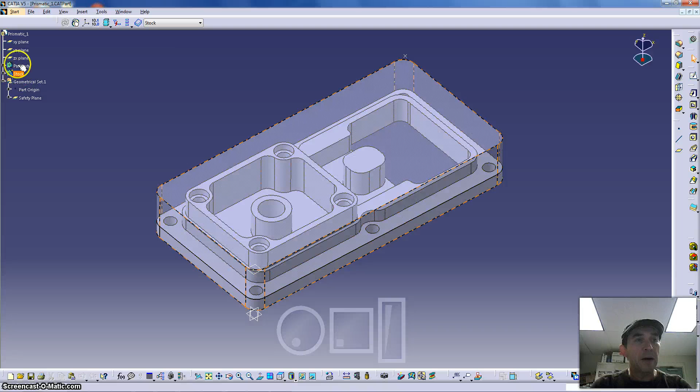If you go over to the part tree, you'll see that there are two bodies in the tree: one is the part body and one is the stock. I'll temporarily hide the stock so you can see the geometry of the part that we'll be machining, and we'll be using this as an example throughout the term to get you familiar with the different machining operations. So this is the part body, and the stock is almost rectangular, with corners that have fillets, which overlaps the final geometry.

This is one way in which you can start off. Obviously, you can also do it using assemblies, where you have one of the bodies in one part and the other body in another part, and we will show you how to do that at some point. But to start off with, both the geometry of your part and the workpiece are in a single part file.

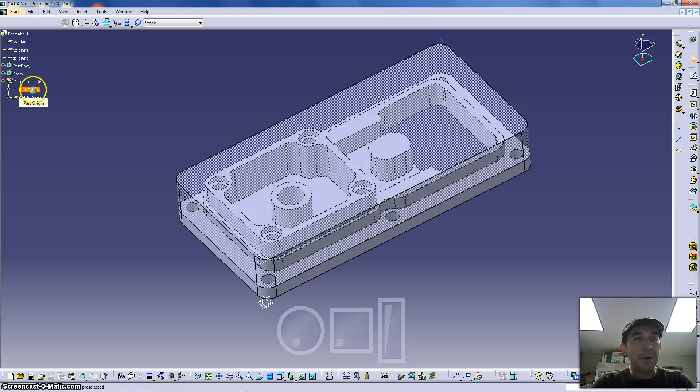A couple of things to point out. There's a geometrical set here, and in this set I've created a point which I'm going to use for the part origin, up here. I recommend that you set your geometry up so that when you go to your standard XY views, your top view, looking at the compass, you're looking down on the XY plane, and according to our convention, the part origin is set up on the top right hand corner of the part.

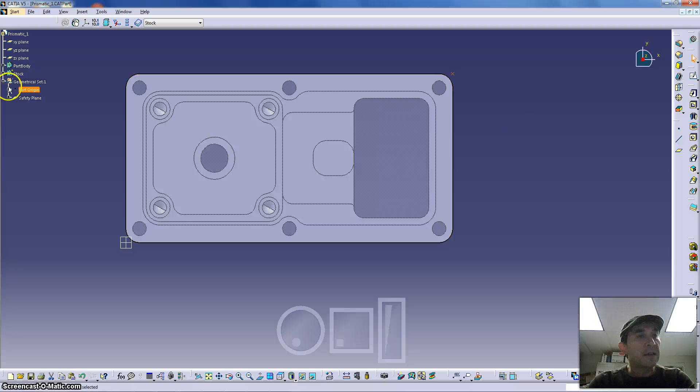We do this both for CATIA as well as for manual part programming. So if there isn't a sharp corner point there, I had to create that point so I could pick it to set up the origin for the machining coordinate system, as you'll see in a bit. The other thing in this set is a safety plane, and if I rotate the model around, you'll see that plane hovering 200 thousandths above the top of the part. Again, that's similar to what we've done for manual machining.

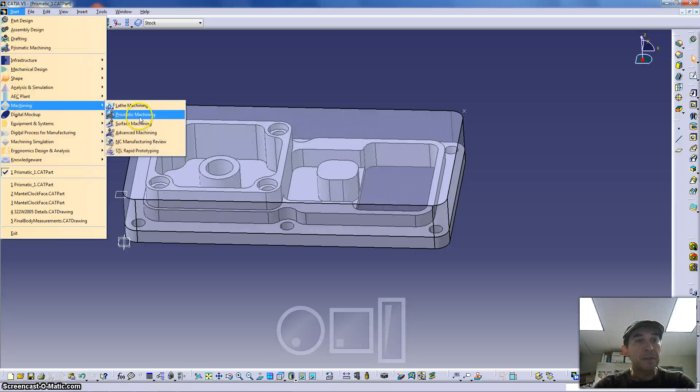Okay, so now I'm going to switch over and go into the Prismatic Machining Workbench. Click on the Start menu, move down all the way to Machining, and then click on Prismatic Machining. It'll take a second or two, or longer, depending on how busy things are on the server. And what you should see in front of you is the new display of toolbars for the Prismatic Machining Workbench.

What should be obvious to you right away is the tree in the top left hand corner looks significantly different. I'm going to expand this a bit to make it a little bit larger so you can see.

What we have in the tree are three things: your process list, your product list, and your resource list. At the moment, pretty much the only thing that's in here is under the product list. If I expand this out, you'll see the part in which the geometry of the workpiece and the final geometry are present. If I expand further, I'll eventually see the part body and the stock body, as well as that set containing the part origin and the safety plane. Now that I've shown you where the part geometry is, let's go into the process list.

I'm going to expand this out here and drill down. Under the process list, there's a part operation, as you can see here, and then a machining process list. The part operation, if you expand that out, contains a manufacturing program. The best way to think of a part operation is a setup, so within a setup, you may have one or more manufacturing programs.

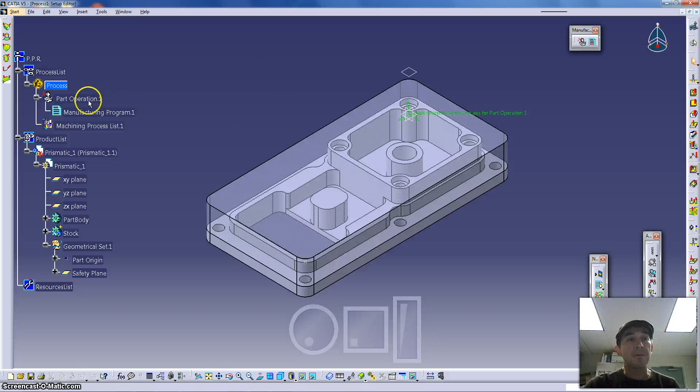Before we get to creating operations, we do have to go ahead and set some parameters inside the part operation. The way to do that is to double click on the part operation, and what you have here is a dialog window which has the name of the part operation. You're free to edit that if it helps you remember your setup, as well as some comments. Then there are a bunch of buttons here that you need to visit, not all of them, but a good chunk, to set up several things.

So the first thing we're going to do is select our machine. I'm going to click on this top button here, and this is the machine editor dialog window. Up here are the types of machines that one can set up. The default machine is a 3-axis machine, and you shouldn't change this because everything we're doing in this class in 322 is on the Haas 3-axis machines. So please leave this selected.

These tabs here, the only one you need to be concerned about is the last one, the numerical control tab. This is pretty important because this is where you get to select your post processor, and the post processor is what is used to convert the way CATIA generates the toolpaths into proper G&M code. So we need to select the post processor that corresponds to the machine that we have in our lab.

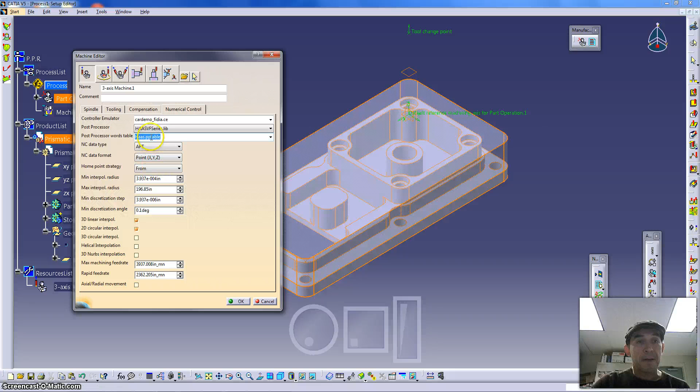You also need to select a post processor's words table. So I'm going to go ahead and click on this, and slide down here until I get to the Haas.pp table, post processor words table. I'm going to select this and have that added here. These are the only things here that you need to be concerned about, and again, this is really important if your code is going to generate correctly at the end of the day.

So once you've done these two things, hit the OK button, and that brings us back to our part operation, or our setup definition. The next button down is our reference machining axis system, or our selection of this.

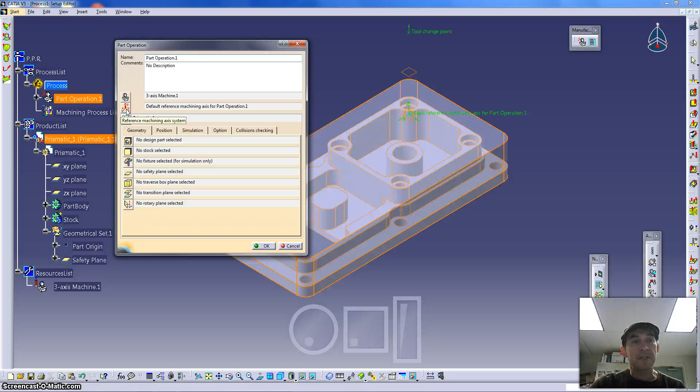If you go and look at the display and move it around a bit, you'll see that there is a green coordinate system that by default is visible, and right now it's set up right at the part origin of the actual geometry of the part. However, if I go to my top view, you notice that that coordinate system is really on the bottom left hand corner, meaning the part is in the first quadrant. According to what we do in this class, we want the coordinate system up here on the top right hand corner so that the part's in the third quadrant.

So we're going to have to move this coordinate system from where it is right now to this point that's been created for it. I'm going to go ahead and click on the second button here, and what you will see is an illustration, and if you move your mouse over it, different parts highlight in orange. So this is actually a pickable illustration, and this is something you'll see time and time again when you do machining in CATIA. There will be these illustrations where you can pick on different parts to select and define geometry.

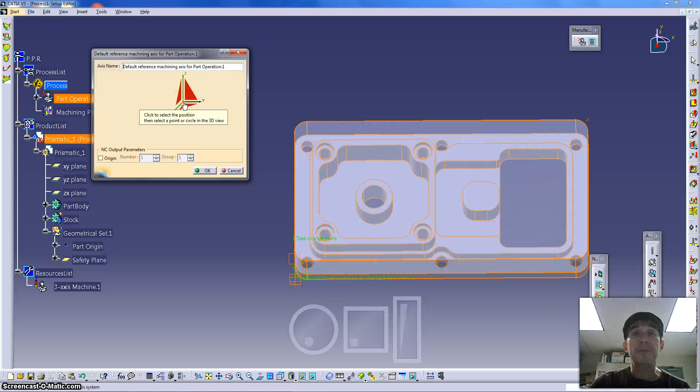Right now, the main thing that you're going to want to pick here is this dot in the center, which allows you to pick your origin, the location of the coordinate system. So I'm going to click on this, and then move over here and select this point.

You can see now that the coordinate system has moved from the bottom left hand corner to the point I picked, and everything shows up green. That means it's been selected, so CATIA knows the coordinate system has been selected. Previously it was red. Even if you wanted to leave the coordinate system at the bottom left hand corner, you would still have to click the button and reselect it for CATIA to actually understand it. So this has to be green, in other words. It can't be red if the coordinate system is properly set up.

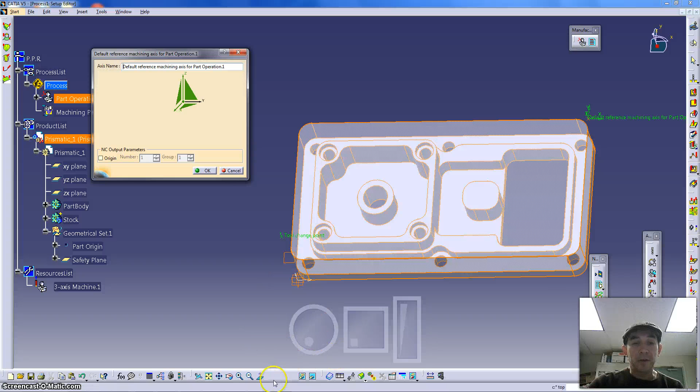So again, if I go to my top view, my XY view, you can see that the x-axis is off to the right, the y-axis is up, and the part is completely within the third quadrant. I'm going to hit OK, and that's my part coordinate system selected.

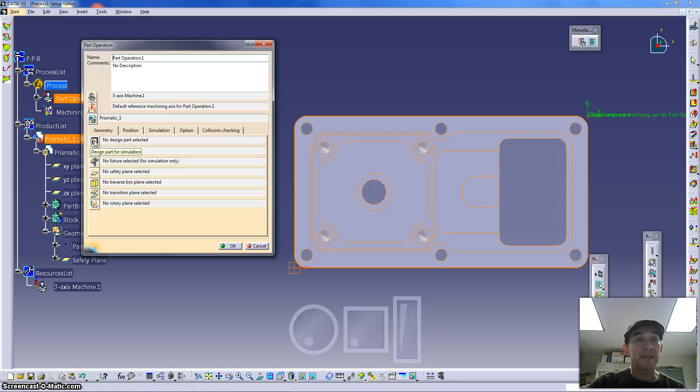I'm going to move downwards now to these buttons down here. This first button is where I select the design part for simulation, so I have to select the design, that's the final geometry, as well as the stock. There are a couple of ways you can select the design: one is graphically, the other is by selecting the body that corresponds to the geometry you want.

I'm going to temporarily hide the stock so I can pick the body. When you click with your left mouse, nothing appears to happen, but you have in fact selected it. To bring the dialog window back, you move the mouse off the part and double click to indicate you've completed the pick, because it's possible to pick multiple bodies for your part body. Let's say you had a fixture with multiple bodies and wanted to machine more than one part at the same time.

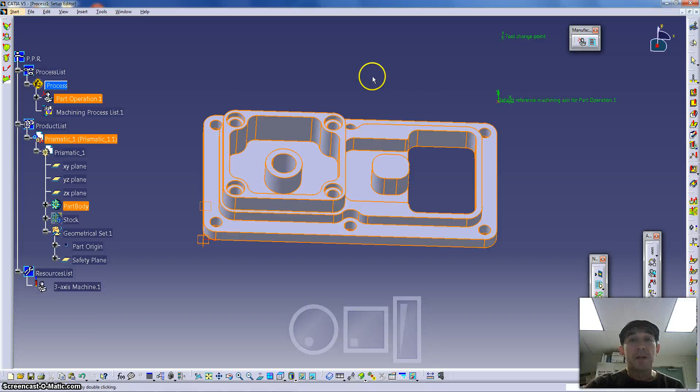You can do it by picking each. So I'm going to move off the part and double click. The dialog window comes back, and you should see a path here that indicates the path in the product tree to the part body: prismatic 1, prismatic 1 again, and then the part body, which confirms you've selected it correctly.

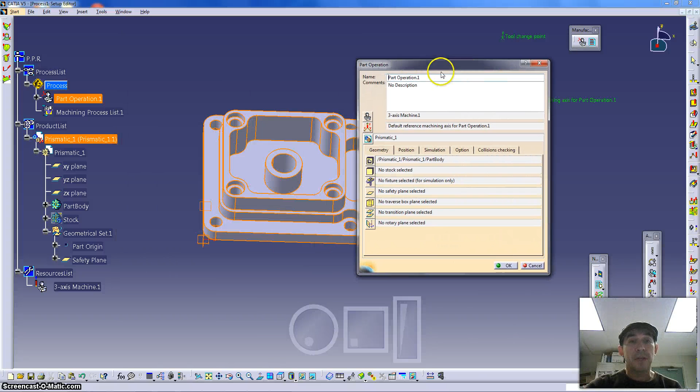Now I'm going to do the same thing for the stock. I'll come over here and unhide the stock, select the stock button, then click on the stock, and double click on the background, and again the path should confirm that you've correctly selected the stock. So that's our part geometry and stock selected.

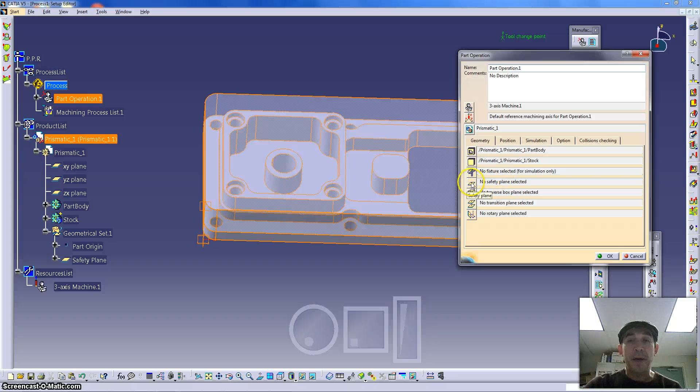The remaining buttons here, the only one you need to be concerned about right now is the safety plane. This is your global safety plane, and it's good to have that selected. It means this is the plane the tool will go to on approaches and retracts. So I'm going to select this and select the plane. Again, you can either select from the tree or from the graphic window. In this case, the window pops right back up, so you don't have to double click in the background.

And that's pretty much everything you need to define for the part operation or setup. Once you're done with this, you can go ahead and hit the OK button like this.

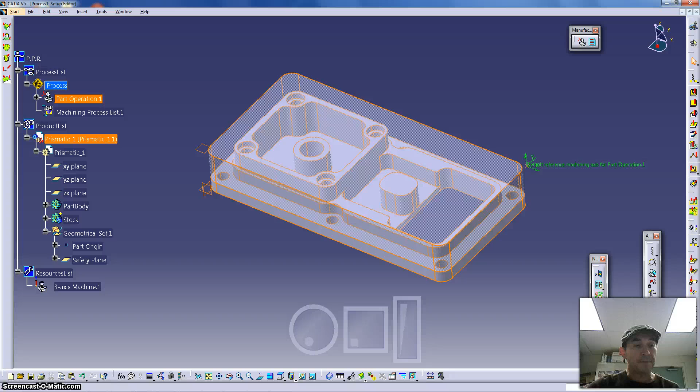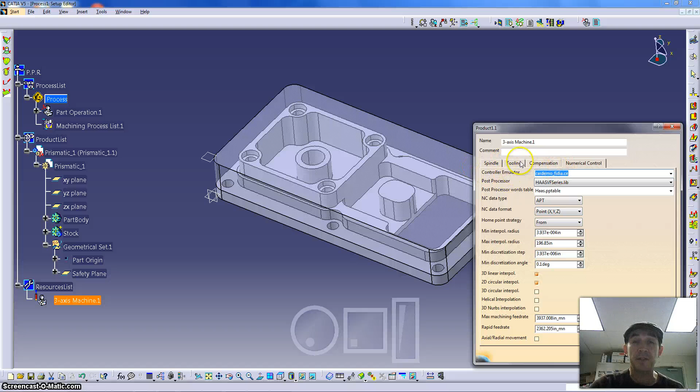Okay, we have now defined our part operation or setup. Now we're going to start adding machining operations. Before we do this, just look momentarily at the tree again. Our part operation is up here. If you go to the very last entry in the tree, this is our resource list, and you can see that the machine we defined when we set up the machine within the part operation is now part of the resource list. By double clicking on this, you can come back in and modify things. We don't want to do anything here right now, but I'm pointing out that you can access your machine through the resource list now, in addition to going back into the part operation.

Other things that will show up in the resource list are tools. Once you start creating your operations and adding tools, you'll start to see a list of tools showing up under the resource list. I'm going to expand out my part operation so I can see my manufacturing program. I'm going to start creating operations now.

The first one I'm going to create is a facing operation, and I'm going to place that facing operation inside this manufacturing program. So consider this an NC program. I'll put a facing operation to start, and then I'll probably have a bunch of other operations to do things like end milling or drilling and so on, and all of those will belong to more than likely this one manufacturing program. Let's look at the toolbars.

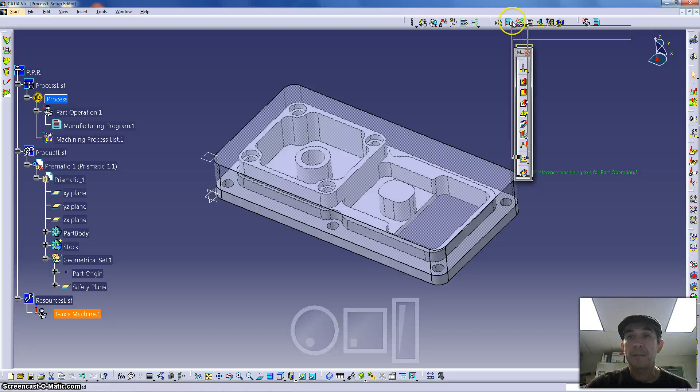So I'm going to pull a toolbar off here, and I'm going to set it up so that it's horizontal. I'm going to pull it off again.